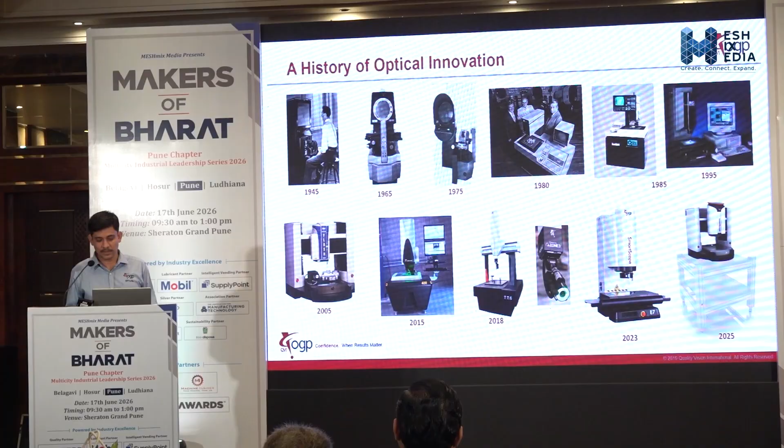So in 2025 we have multi-sensor video measurement systems and CMMs as well. We have more than 85 different models in video measurement systems, starting from profile projectors, manual video measurement systems, large bed video measurement systems, multi-sensor video measurement systems, 3D scanners, shaft measurement systems, and CMMs.

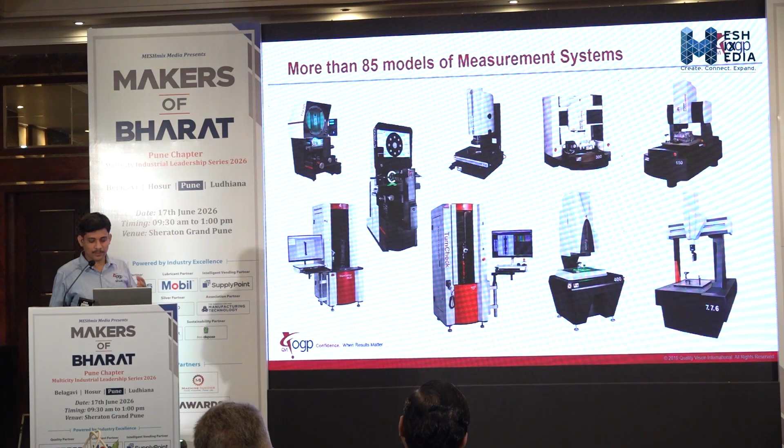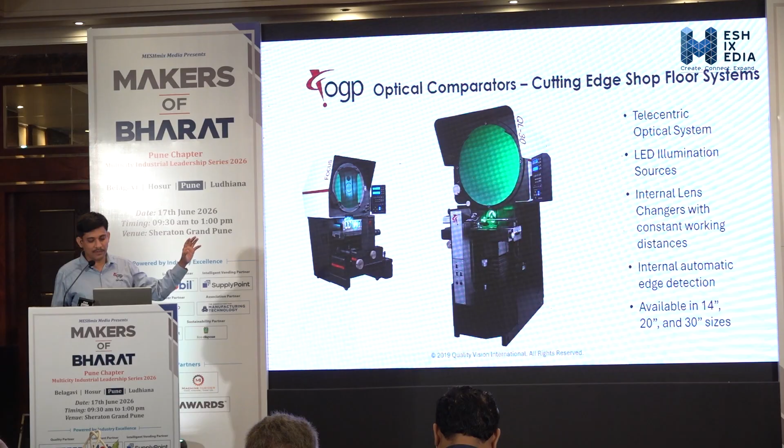In profile projectors, we have two models: one is the benchtop and one is the floor model. The beauty of the system is we use OGP's patented telecentric optical systems. It has LED illumination, and is available with 14-inch, 20-inch, and 30-inch fields of view.

Next product is the C-Vision, which is the best of both worlds, a combination of video measurement systems and profile projectors. It has a 4-inch field of view and 6-inch depth of focus. It also has digital CAD overlay, where we can import a CAD file and generate steps.

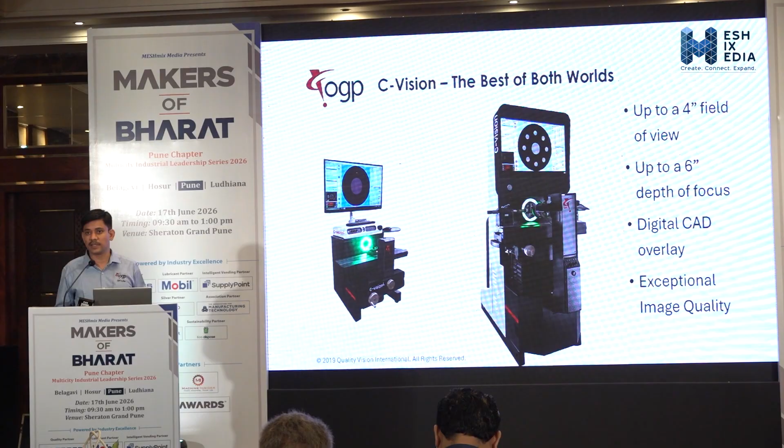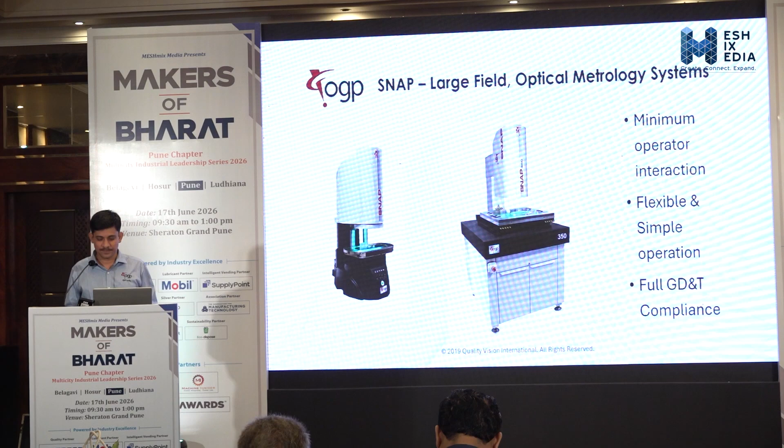The third one is the Snap machine, which is a shop floor machine. It requires minimal operator interaction. Simply keep a part on the glass, and the machine will automatically extract the features on the part and give the results. It's a shop floor machine, ideal for 2D measuring or 2D parts, and it complies with full GD&T compliances.

OGP's bread and butter product, I would say, is the SmartScope, which is globally accepted as the industry leader with the SmartScope series. I'll introduce the SmartScope M series with a video, so I'll just run a video of the SmartScope series.

Ease. Speed. Reliability.

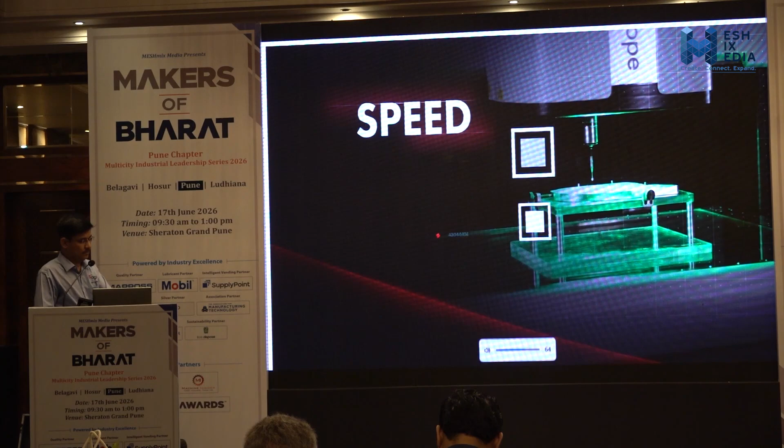Introducing OGP SmartScope M Series multi-sensor metrology systems, powered by Zone3 metrology software. Achieving precise and repeatable measurement accuracy in a high-volume production environment doesn't need to be challenging. Trust SmartScope M Series to achieve accurate and repeatable results with full 3D capabilities that measure even the most nuanced details, all in one intuitive, easy-to-use system.

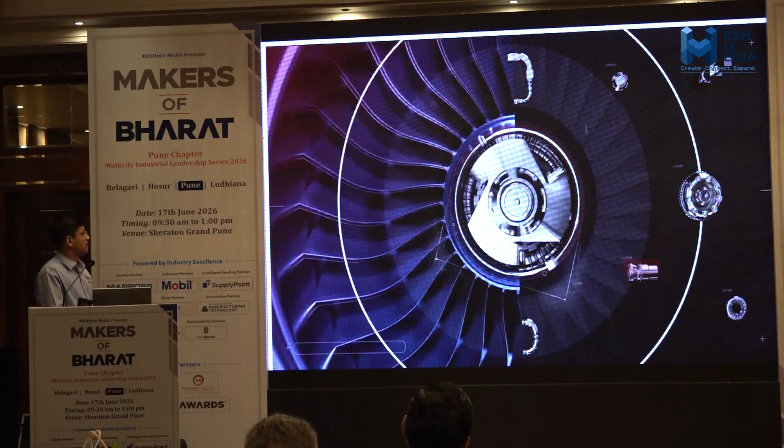Enhance your throughput instantly by quickly pivoting from the fully telecentric optical system to tactile, non-contact, and laser sensors—all on just one machine.

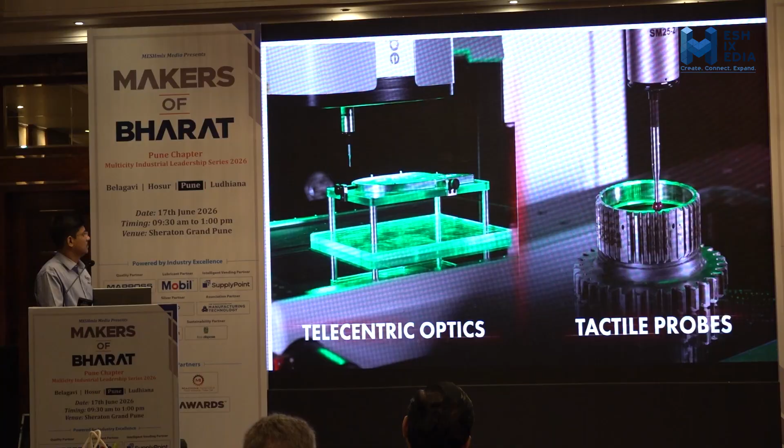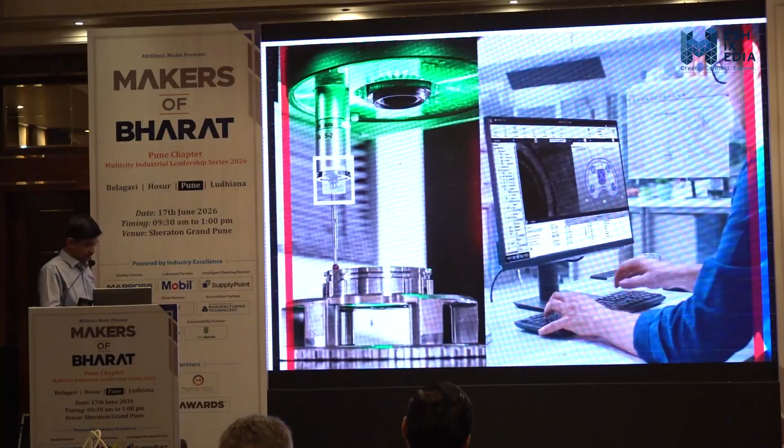Measure faster and more at once, and simplify complex routines by centralizing your programming and rapidly measuring with automatic magnification, consistent lighting, and simultaneous validation.

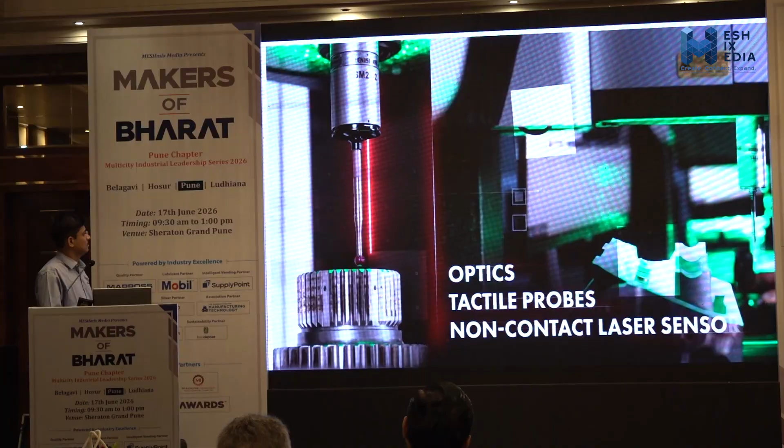Get scalable technology that adds flexibility to meet today and tomorrow's needs with SmartScope M Series—the convenience of a CAD-based multi-sensor system featuring the latest in optical technologies empowers you to run inspections rapidly and address multiple application requirements.

Fast-track measurement routines and quickly adapt your system to future business needs.

Free your operators to accomplish more through faster evaluation, analysis, and collaboration. With intuitive Zone 3 software, your teams get the ease and flexibility they need and the repeatability they require to measure every component quickly and with greater precision.

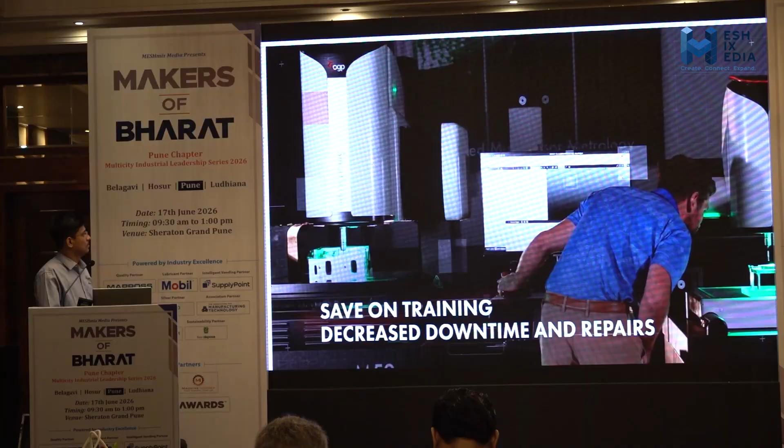Lower your operational costs by having one machine do the work of multiple. With one multi-sensor system, you'll not only save on training, but you'll also decrease downtime, simplify maintenance, address multiple use cases, and so much more.

Are you ready to measure fast and manufacture faster? Contact us to see what SmartScope M Series can do for you today.

So that is for the SmartScope series, and we have multiple products in terms of sizes in the M series. It has the intelli-centric M optical systems, and it is a fully 3D, multi-sensor capable machine.

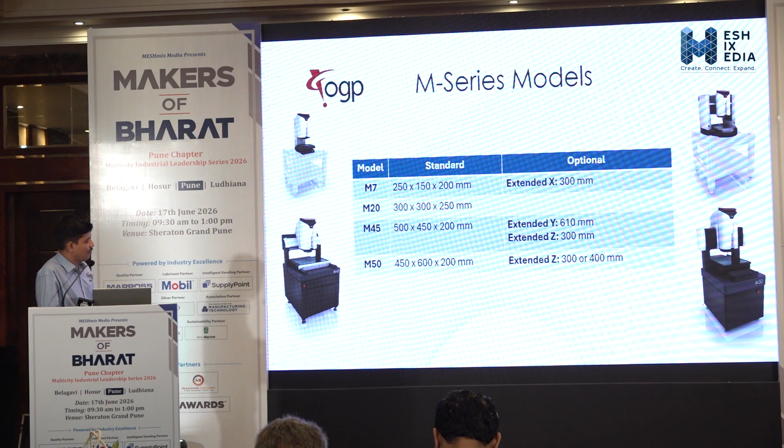It has 4 models as of now: M7, M20, M45, and M50. These are defined by the measuring inspection bed size. The M7 has a 250 by 150 by 200 mm bed size, and the floor machine M50 has a 450 by 600 by 200 mm bed size.

It has multiple sensor options like grid projector, touch probe, TP20 and TP200 modules with low force and standard force. For scanning probe, we have a feather probe which is patented by OGP. We have a TTL laser which comes through the lens, and we have a DRS laser, which is a digital range sensor.

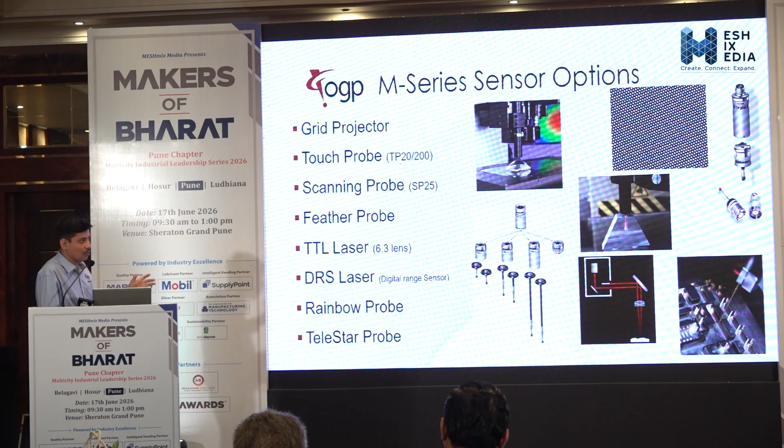Apart from this, we also have a rainbow probe and a telestar probe. We suggest these based on the specific applications.

We use our Zone 3 3D software with the machines, which is a fully 3D software. We can import a CAD file, IGES, or STEP file, and with the help of these files, we can create the steps and run the program.

The inspection report is fully customized. It has a graphical view, tolerance view, and we can customize everything as per the customer's needs.

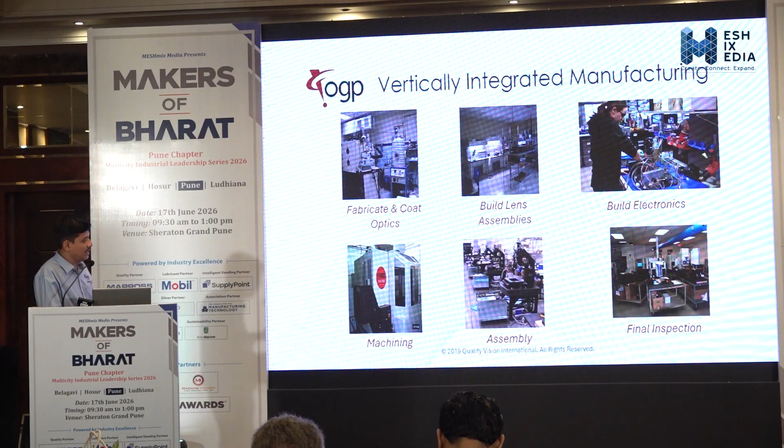So why OGP? Because OGP has a vertically integrated manufacturing facility. We have our own optics and fabrication shop, our own lens assembly shops, and we do electronics build in-house. We also do machining, assembly, and final inspection.

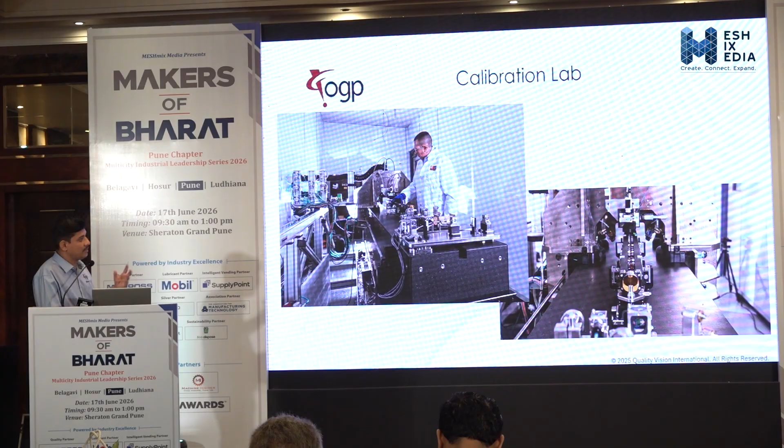We have our own optics shop, as I said, and our own electronic shop. We have our own calibration lab where each and every machine is calibrated and shipped across the globe. We have multiple accreditations and ISO certifications.

We have a large patent portfolio under the name of OGP, and we have global sales and support offices.

In India, we are based in Pune and Bangalore with tech centers, and apart from that, we also have residential engineers. OGP machines have been adopted by industry leaders from automotive, aerospace, electricals and electronics, and general engineering applications.

So in each and every segment, the industry leaders are using OGP machines.

So that's it from OGP, and we have kept our stall in the lobby. I would request everyone to visit our stall and discuss our applications. Thank you.